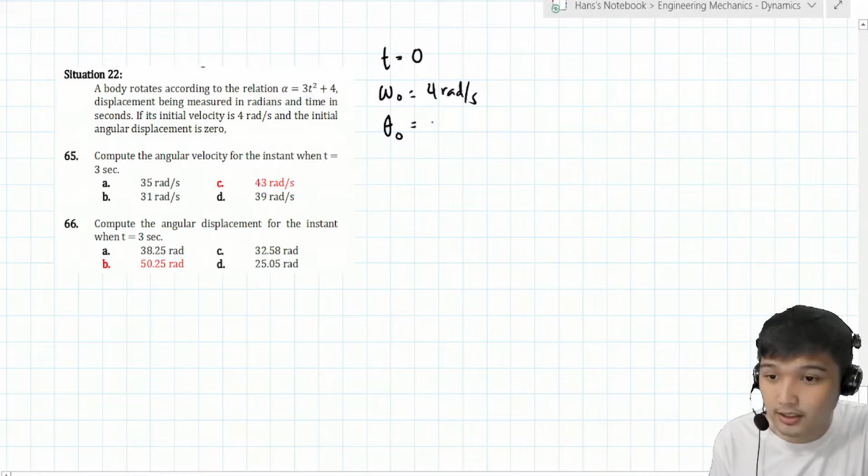Angular displacement - so the relationship between angular acceleration and time t is given as alpha equals 3t squared plus 4. For number 65, we're asked for the angular velocity when t equals 3 seconds.

Now what we can do is recall that alpha is d omega over dt. Let's rewrite the equation: d omega over dt equals 3t squared plus 4, then cross multiply to get dt, and then let's integrate.

So integrating, omega becomes 3t cubed over 3 plus 4t plus c. Let's cancel this, but there's still a constant c, so to eliminate that constant we can use the initial condition.

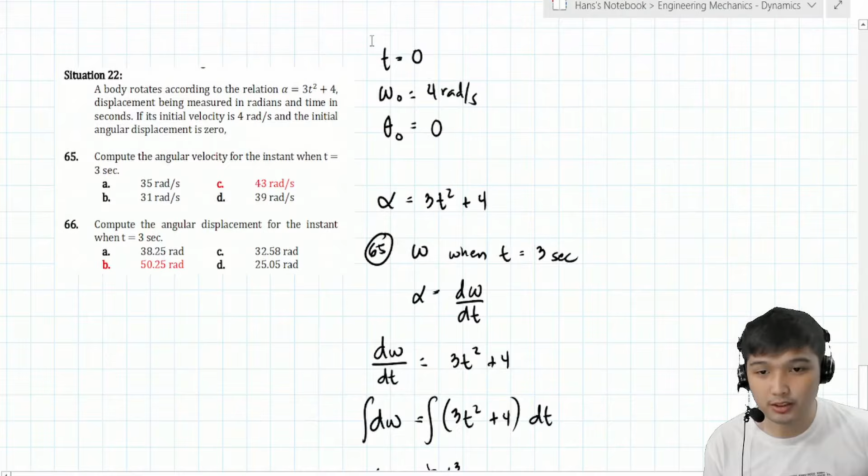At t equals 0, omega equals 4. Rewriting, omega equals t cubed plus 4t plus c. So 4 equals 0 cubed plus 4 times 0 plus c, therefore c equals 4. So the equation relating omega to time t becomes t cubed plus 4t plus 4.

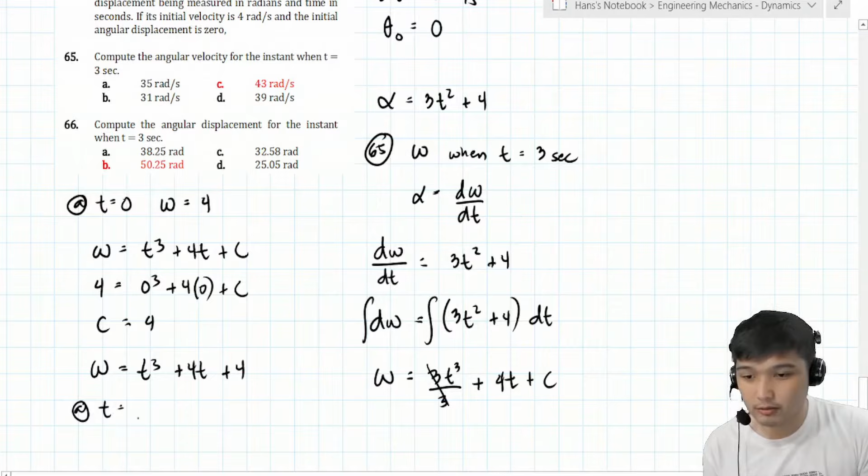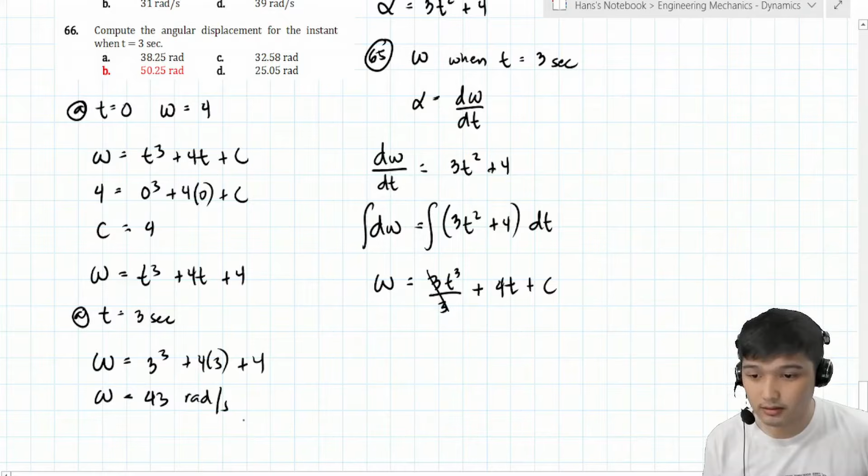Now we can solve for omega at t equals 3 seconds. Rewriting, it becomes 3 cubed plus 4 times 3 plus 4. So how much is the angular velocity after 3 seconds, guys? That is 43 radians per second. Let's check if we're correct - yes, 43. Check.

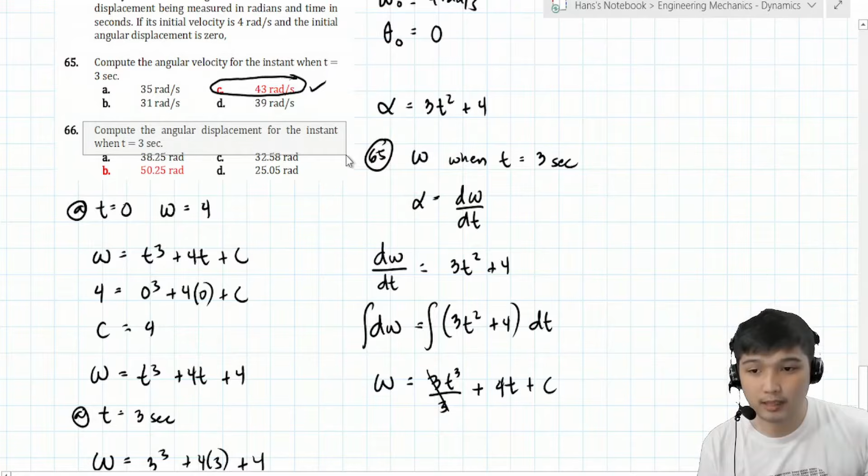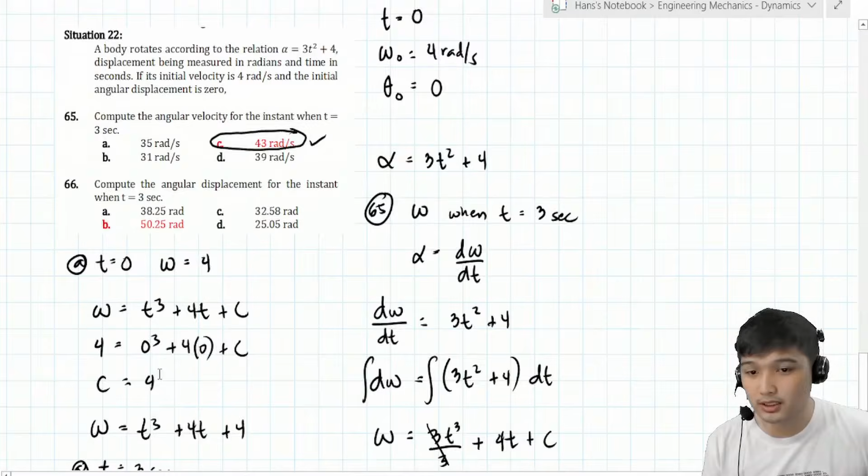Next is to compute the angular displacement when time equals 3 seconds. Let's start from this equation here, let me rewrite it for number 66 down here. We're asked for theta when t equals 3 seconds.

So let's start now with the angular velocity. Recall that angular velocity is d theta over dt. We have to rewrite this as d theta over dt equals t cubed plus 4t plus 4. Cross multiply, so it becomes t cubed plus 4t plus 4 dt.

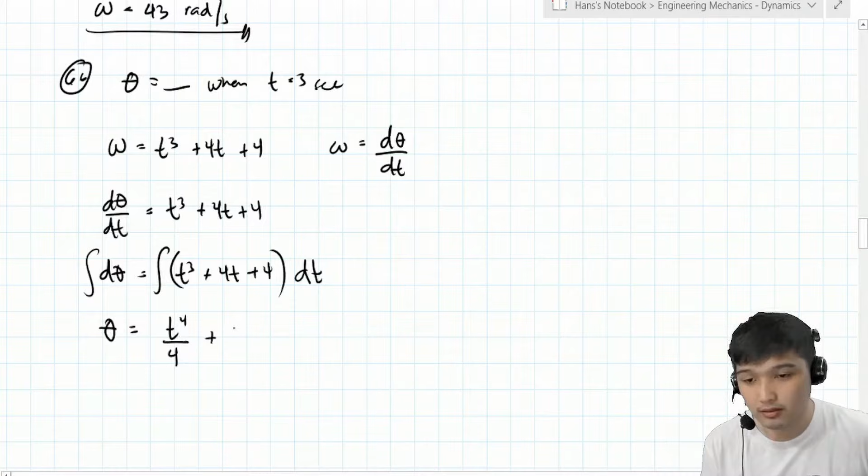So integrate, therefore theta becomes t raised to 4 over 4, plus 4t squared over 2, plus 4t, plus c. Let's simplify this to 2. As you can see, there's still a c, so we have to eliminate that c.

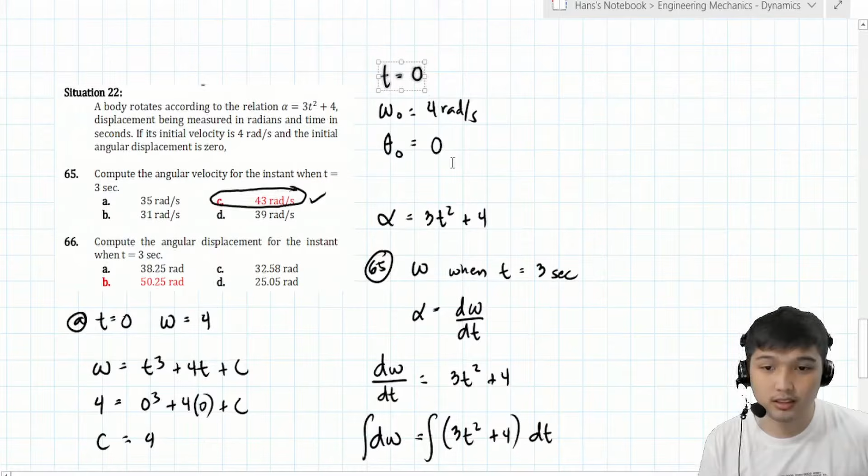Where do we eliminate that, guys? Using again the initial condition that at time equals 0, theta equals 0. Let's put that here: at t equals 0, theta equals 0. So let's use the equation: theta equals t raised to 4 over 4 plus 2t squared plus 4t plus c.

Substituting, 0 equals - as you can see, this all becomes 0 - 0 plus 0 plus 0 plus c. Therefore c now equals 0. So this is now the equation relating the angular displacement and the time t.

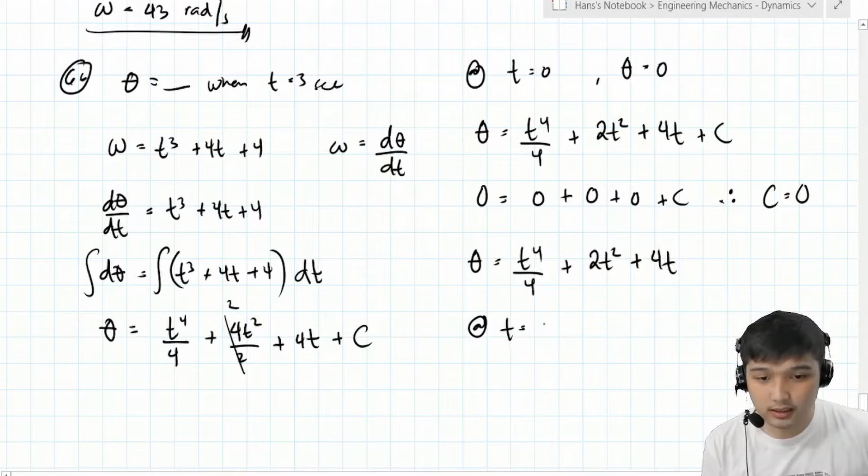So what's being asked: at t equals 3 seconds, substitute, theta now equals 3 raised to 4 over 4 plus 2 times 3 squared, plus 4 times 3. So how much is the angular displacement after 3 seconds?

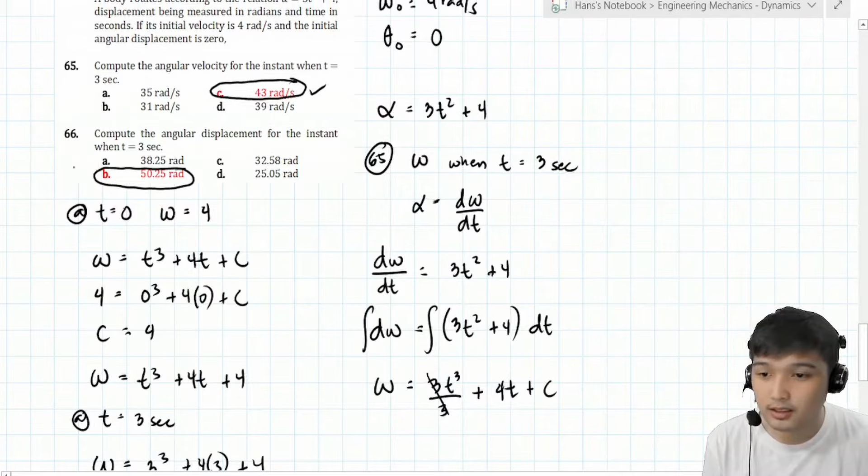The answer is 50.25, and the unit will be in radians. Let's check if you're correct - correct, guys, letter B. Check. So let's move to the next item.

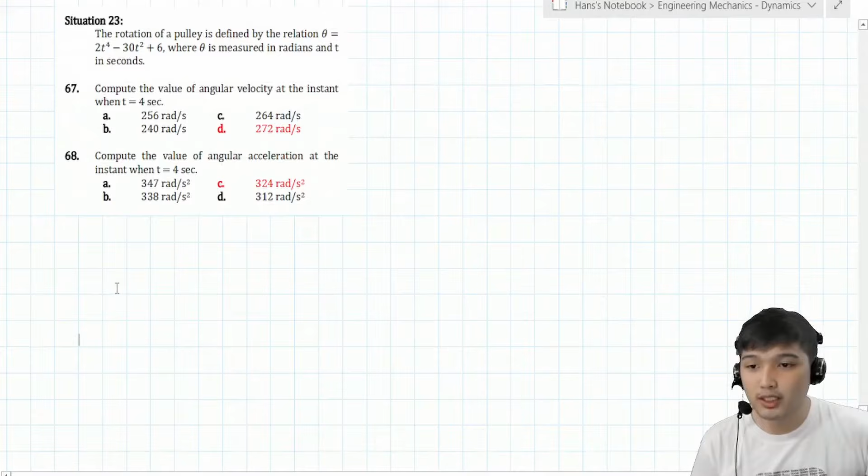So, Situation 23. The rotation of a pulley is defined by the relation theta equals 2t raised to 4 minus 30t squared plus 6, where theta is measured in radians and t is in seconds. Compute the value of the angular velocity when t is equal to 4, and compute the value of the angular acceleration at the instant when t is equal to 4 seconds.

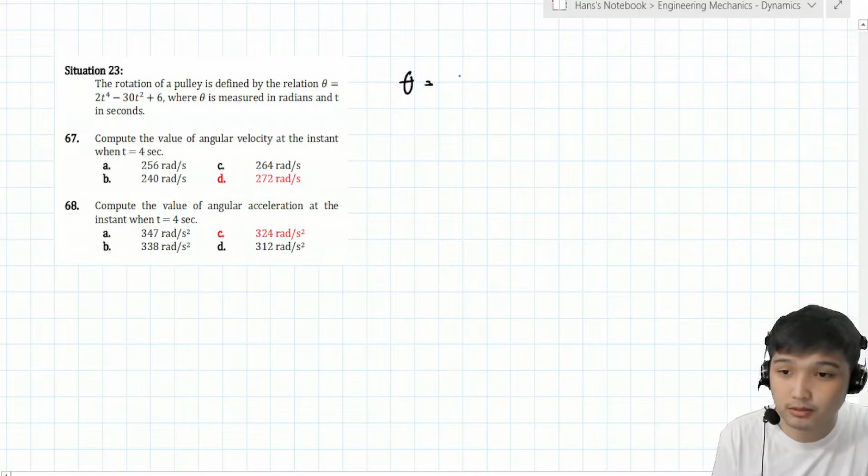So here it's reversed, starting from the relationship of angular displacement to time t. Let's write that: theta is equal to 2t raised to 4 minus 30t squared plus 6.

Taking its first derivative, d theta over dt, we get omega, which is 8t cubed minus 60t. Then taking the second derivative with respect to time t, dt squared.

That becomes the angular acceleration, which is 24t squared minus 60.

So for number 67, what's being asked is at t equal to 4 seconds, the value of omega. Using the equation for omega in terms of time t, that is 8t cubed minus 60t, substitute 4 for t.

So what comes out as the angular velocity at that time? That is simply 272 radians per second. So that is letter D.

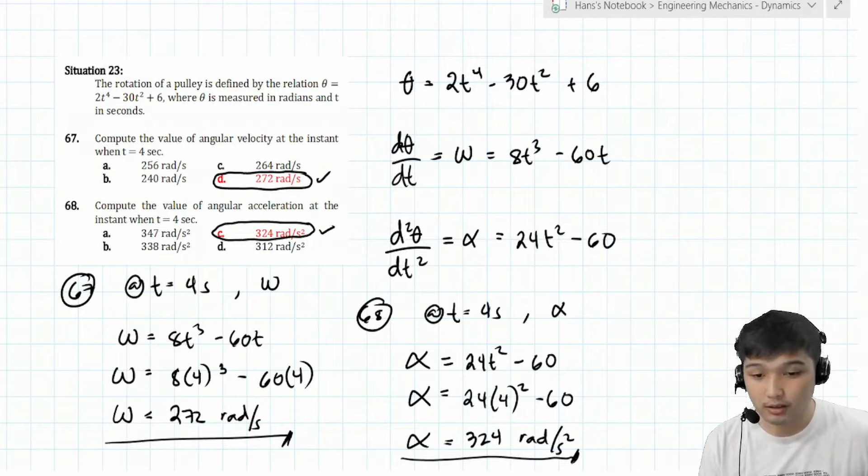Situation 24. The angular acceleration of a pulley which will rotate from rest is increased uniformly from 0 to 12 radians per second squared for 4 seconds, and then uniformly decreased to 4 radians per second squared during the next 3 seconds. The questions: determine the angular velocity at the end of 4 seconds, determine the angular displacement at the end of 4 seconds, and determine the angular displacement at the end of 7 seconds.

As you can see class, there's no given equation relating displacement to time, nor velocity to time, nor acceleration to time. No equation was provided, but what we have is the story of how the acceleration changed. So I think the main focus of the problem is about angular acceleration.

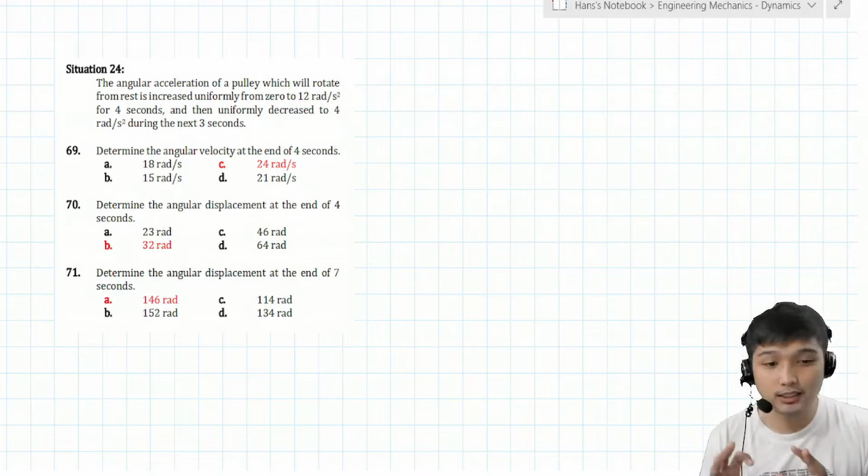This falls under what we call the motion curve. Instead of providing the relationship of our parameters with respect to time t as an equation, it's shown that we can give the relationship using a diagram, and it starts with acceleration. So we can actually graph the acceleration-time diagram, but in this case, it's called the angular acceleration-time diagram. If you recall the motion curve, this is very doable, guys.

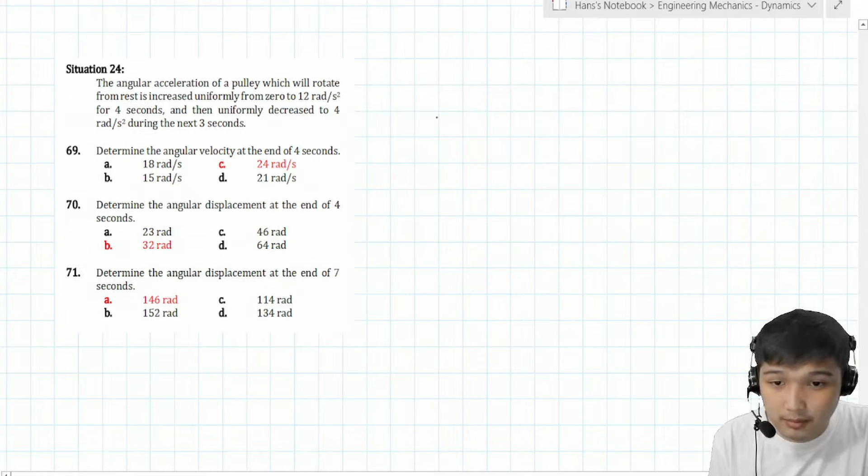Let's interpret and draw the diagram first. Let's say, for example, here. The condition we have is after 4 seconds, so let's say this is 4, this is 0, and after the next 3 seconds, that is 7. Let's label this t, and this is the angular acceleration. Let's call this the angular acceleration-time diagram.

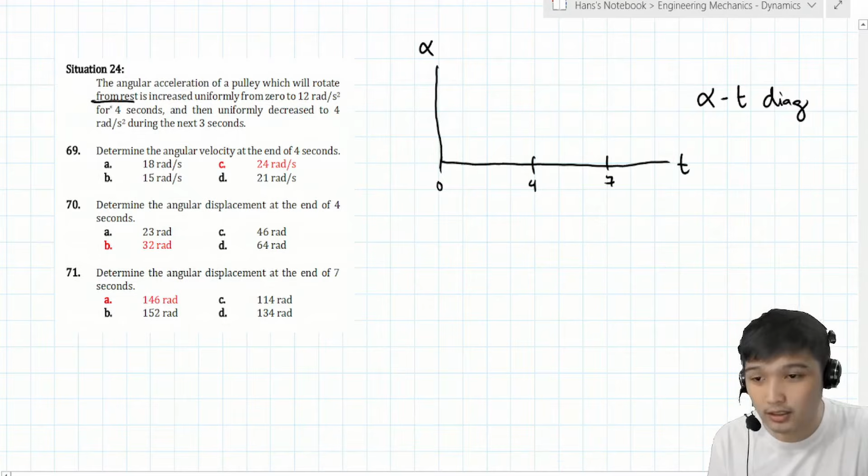So what was said? The angular acceleration of the pulley which will rotate from rest — take note the initial angular velocity is 0. It increased uniformly from 0 to 12 for 4 seconds, meaning at the starting point it's 0, and at 4 seconds it became 12. So for example, this is it.

And it says increased uniformly, meaning this is connected by a line. Let's fix this up, guys.

And then, after the next 3 seconds, the angular acceleration is uniformly decreased to 4 radians per second squared during the next 3 seconds. Meaning at the 7th second, the angular acceleration becomes 4 radians per second squared. So for example, this is it, 4. If we project it here, that's 4.

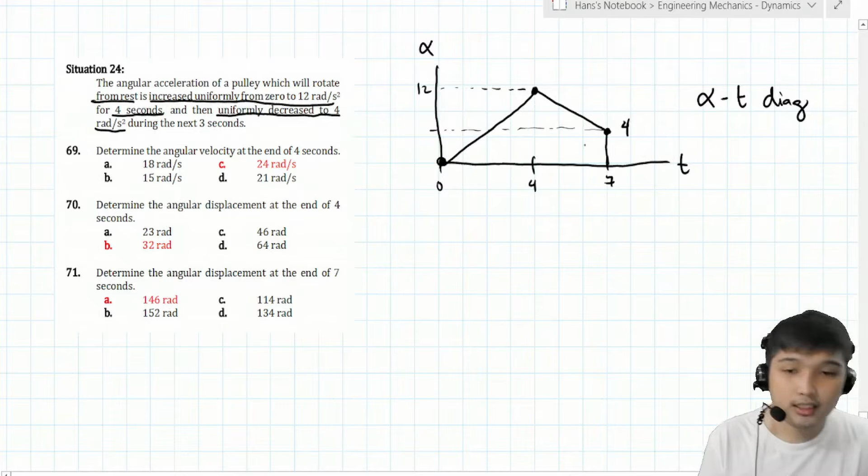And it says uniformly decreased, meaning connected by a line again. So this is the resulting angular acceleration-time diagram. Using that, we can now solve for what's being asked — the velocity and displacement — by further drawing the succeeding diagrams.

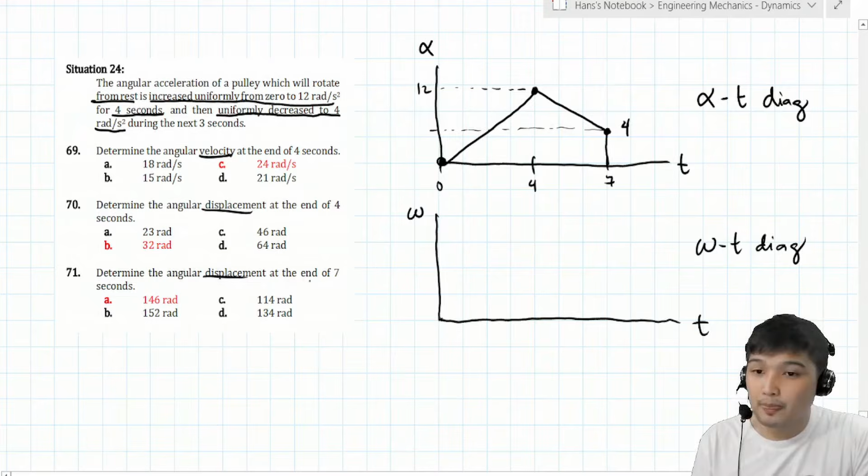So this is the angular velocity time diagram. The initial condition: at time equal to 0, the pulley is at rest, so we're sure we're at 0. Now how do we get to the succeeding points?

Recall the motion curve - that refers to the area of the diagram above. So from 0, we add the area above to get to 4. What is the area of this one? Triangle, 1/2 base is 4, height is 12, so that is 24. So 0 plus 24, we're now at 4 seconds.

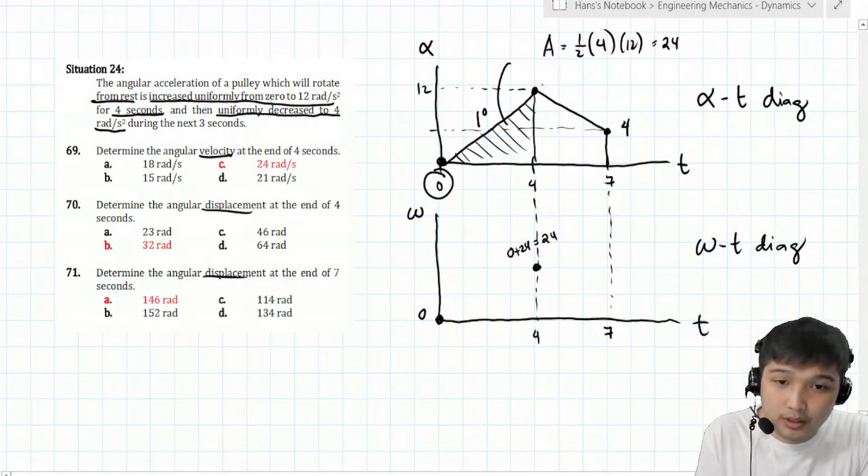For example, this: 0 plus 24, so that's 24. How do we connect that? The diagram above is first degree, so this one is second degree. What type of second degree - increasing or decreasing slope? Check the diagram above: it starts at 0, goes to 12, so that's increasing. So we use the increasing curve, from negative slope going to positive slope, so concave upward.

So I think we've answered the first question: determine the angular velocity at the end of 4 seconds. The answer is 24 rad per second. Now let's continue drawing the diagram.

To get to 7 seconds, what do we do? We add this area, which is a trapezoid. For the area: 1/2, base 1 is 12, the other is 4, and the length is 3. How much is that? That is 24. Positive area, meaning from 24 we go up another 24, so 24 plus 24 equals 48. So after 7 seconds, we're at 48 rad per second.

How do we connect that? This is still first degree, so this one is second degree. We need to connect the 2 points using a second degree curve. What type? From 12, what's the height now - 4. So from 12 it becomes 4, that is decreasing. So we use the decreasing slope, from positive going to negative, so that is concave downward.

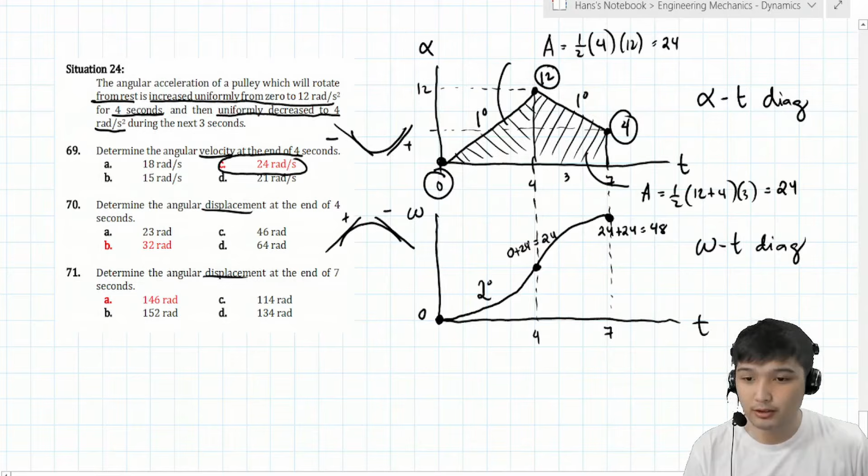So that's now the curve representing the angular velocity time diagram. Finally we can now solve the last 2 items being asked, which is angular displacement.

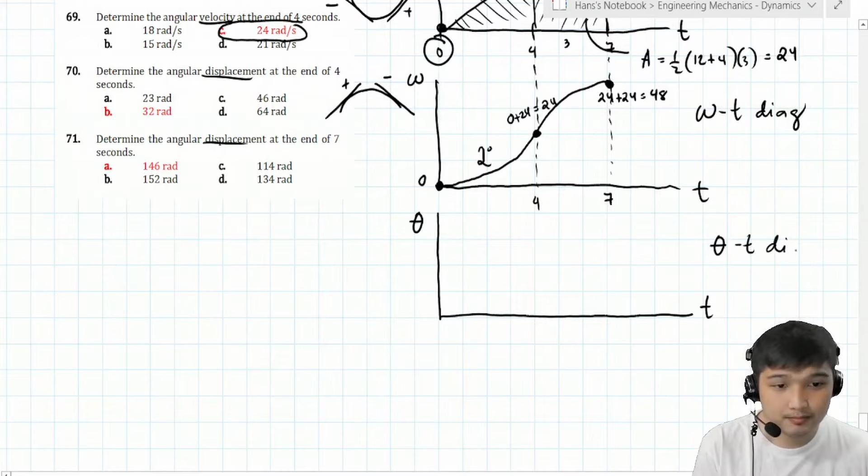We just have to draw the third diagram. Let's call this the theta or angular displacement time diagram. Let's start drawing - mark the important points, 4 and 7.

It was said initially, where is it? Nothing was stated, so let's assume it starts at 0. If it's at 0, how do we get to 4 seconds? We just add the area above. This one is second degree, so can we use the area of the spandrel, which is 1/3 base times the height, for second degree?

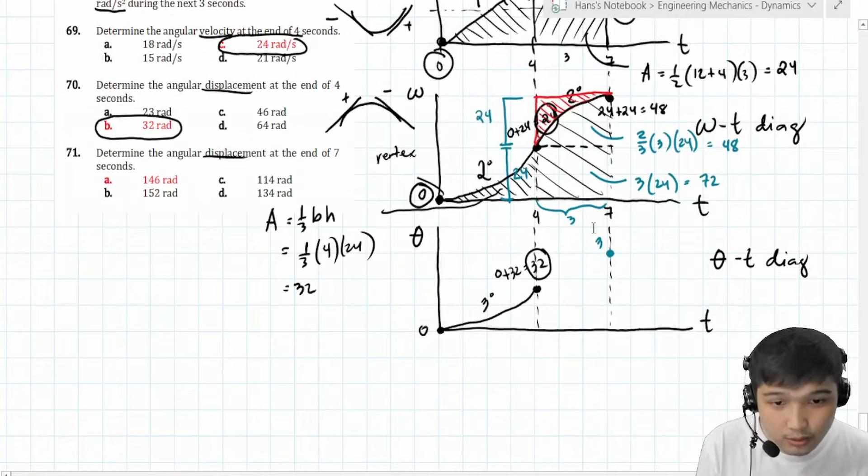So if you forced that, guys, what would happen is the point here after 7 seconds would be from 32, which is this, plus the area. Plus 48 plus 72. So how much is that, guys? So the answer there is 152.

Okay, let's continue. So, right, this point, 24. Then this, 48. So, meaning to say, increasing. So the curve we'll use is concave upward. So like this.

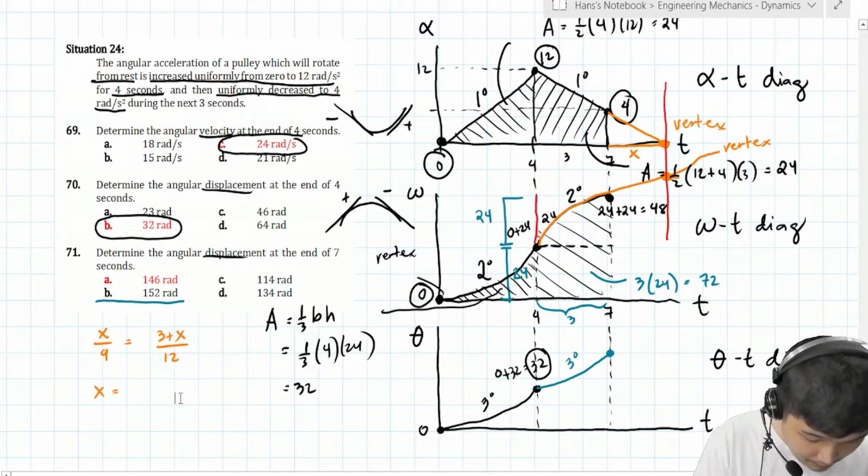Ay, hindi to 3 plus 4, no? Ano to? 3 plus x. Ulitin ko, for x, the height is 4. So for the length of 3 plus x, the height is 12. Ilan yung x, guys? Okay, so that is 1.5.

So may additional length na 1.5. Kung bibigyan kong kulay ito, guys, take note, ito lang yung gusto natin. I-highlight ko ng dilaw. Ito lang yung gusto natin. Sabi nga natin, hindi applicable yung 2/3 base times the height kung hindi vertex yung dulo.

So what we can do is maybe we can solve muna ito. Kapag kinuha ko to, itong sinishade kong kulay red, nakita nyo ba yan? Yung buong part neto ng parabola, for that scenario, applicable ba yung 2/3 base times the height? Para sa area na to, sa shaded region, pwede yun, guys, kasi yung endpoint natin is a vertex. So for the shaded region, tama yan, yan ay 2/3 base times the height.

So ang problema, ano yung base niya? Siyempre, itong length na to. Ilan ba yung length na yan? Di ba 3 plus x yan? So that is 3 plus 1.5. This one is 4.5. So 2/3 base.

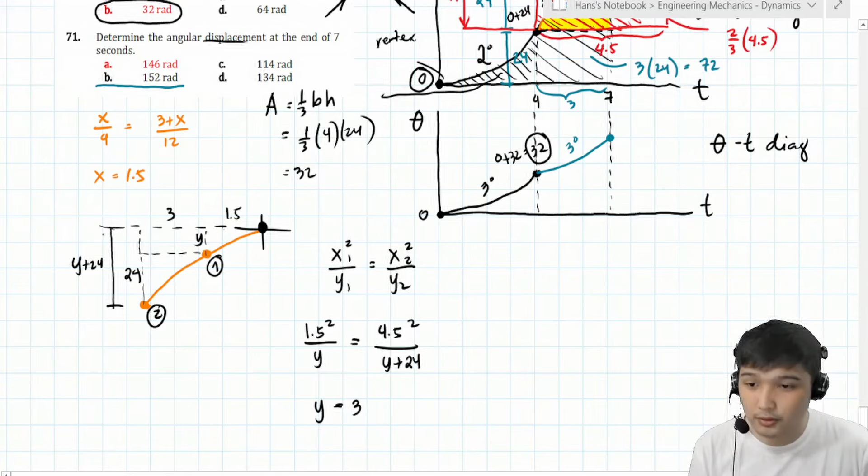Okay, so y is 3. So therefore, yung total height pala nito is 27. Na yun yung kailangan natin dito na h. Okay lang? So lagay natin, ito ay 27.

So therefore, balik tayo dun sa shaded ng red, ito. So that is 2/3 base is 4.5, height is 27. So ilan yan? 81. But take note, ang kailangan lang natin is itong shaded ng kulay dilaw.

So pwede siguro akong pumunta dito, no? Dito ko na i-continue yung solution ko. So ito kasi yung kulay red, no? Yung total na to. Pero ang kailangan nga lang natin is ito, yung kinulayan ko ng dilaw.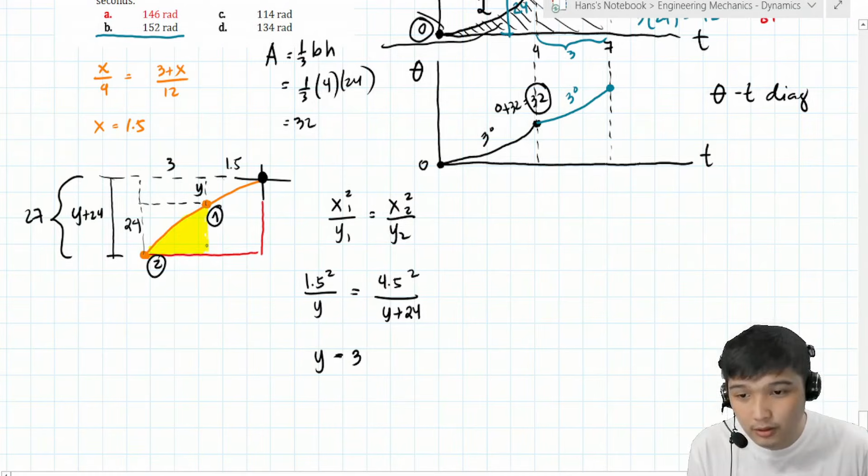So anong gagawin natin sa 81? E di from the 81, tatanggalin naman natin itong kukulayan ko ng kulay blue. Ayan. So sa kinulayan kong kulay blue, meron dalawang segment: isang rectangle at isang parabola.

For this parabola, applicable na yung 2/3 base times the height since yung endpoint nga na to is vertex. So applicable sa kanya yung 2/3 base times the height. Okay? So recall, ano yung height niya guys nung parabola na yan?

Di ba 3 lang? Ito sa baba, ilan to? 24 to, di ba? So gawin natin, 2/3 base is 1.5 and then yung height niya is 3. So ilan yan guys? I think 4.5 for the parabola dito.

And then for the blue region na rectangle, area is, base is 1.5, height is 24. That is 36. So meaning to say, yung area ng dilaw, ito na lang. So meaning to say, yung area niyan, yung tinuturo ko, is equal to the total area nung malaking parabola na yan, which is nakuha na natin kanina as 81, minus itong maliit na parabola, which is 4.5, minus itong area na to ng rectangle, 36.

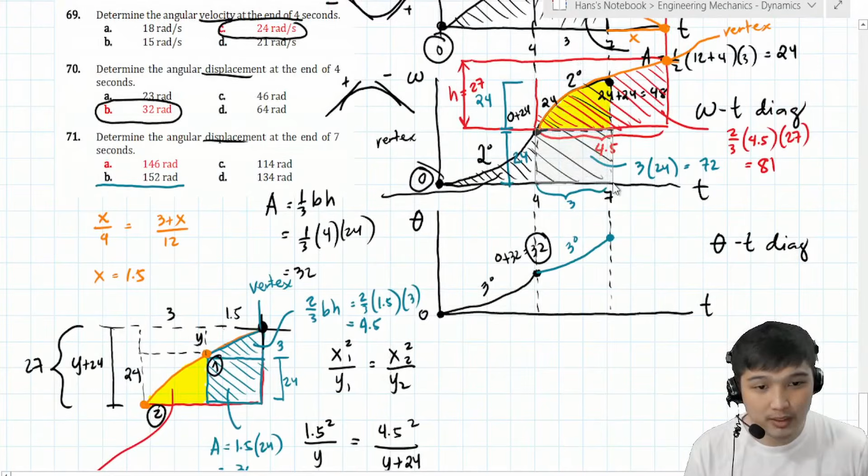Ito sure naman na to na 72. So, kung babalikan natin yung procedure from 32, ang gagawin natin, lagay natin dito, 32. Ipa-plus natin tong shaded as 40.5. Plus, itong rectangle sa baba as 72. I-check na natin guys, tama ba?

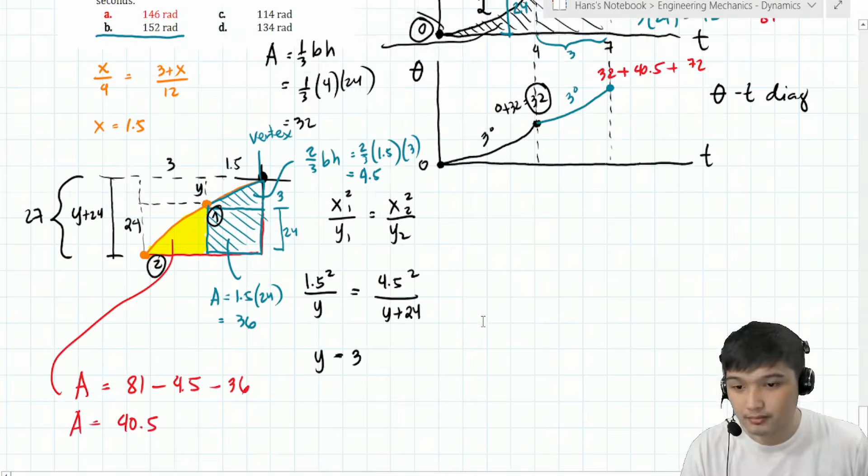Ayan, no? So, nagtaka ako bakit may 0.5. Ito pala ay ano lang. Ito ay 3 lang guys. So, ayusin natin. Ito ay 3 lang. So, therefore, ito ay minus 3. At ilan ito guys? So, sorry guys.

Ayan, ito pala ay 42. Ayan. So, balik tayo. So, ito pala ay plus 42. Okay lang? Ayan na, 2/3 of 1.5 times 3. Ano lang pala yun? 3 lang pala. So, namali pa ako ng mental, no? But anyways, ayan na siya.

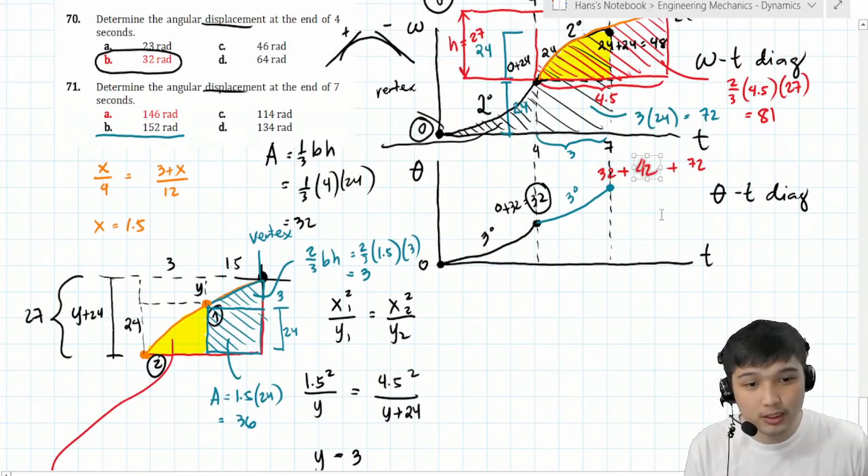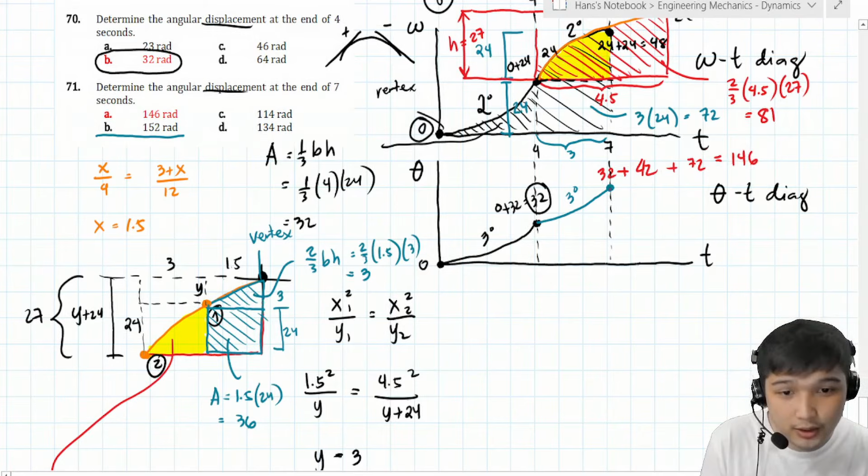32 plus 42 plus 72. So, ilan yan, guys? Okay, so that is a total of 146. So, yun na ngayon yung height at this point, which is, yun na hinahanap natin, angular displacement at the end of 7 seconds. So, the correct answer is letter A.

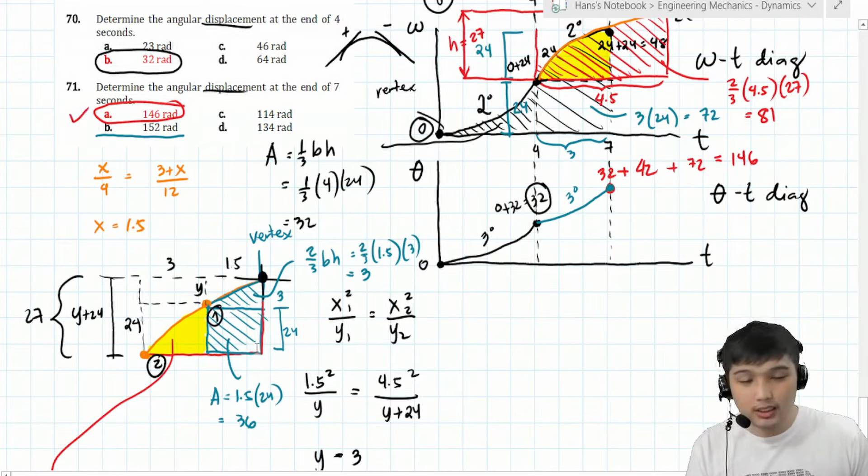Okay, so check. So, as you can see, sobrang prone sa error ng solution na to. At the same time, kailangan mo yung ganitong analysis. Hanapin mo yung vertex. Marunong kang gumamit ng square property of parabola. Tapos marunong kang kumuha ng mga segmental areas. No? Alam mo yung mga geometry. So, hindi ka rin magkakamali katulad ko na pipindot na lang ng calculator, minental pa. So, nagkamali. No? So, ganun siya ka-prone sa error kung yan nga yung ipo-pursue mong solusyon.

So, that's why, balikan natin yung tinatawag natin as moment area method. So, recall, sinasabi ng moment area method that yung position niya at point 2 ay equal sa position niya at point 1 plus yung initial velocity niya times yung time interval between point 1 saka point 2 and then plus the area, okay, area moment of the acceleration time diagram between that time interval.

So that is the same, no, for the rotation or angular measurement. So magiging ano lang to, theta 2 is equal to theta 1 plus ito magiging omega 1 lang time interval t. Ganun pa rin to. Area moment of the angular acceleration time diagram. Okay, mapapalitan lang yung mga symbol. So, tingin na lang tayo dito, guys. 'Di ba ito yung angular acceleration time diagram?

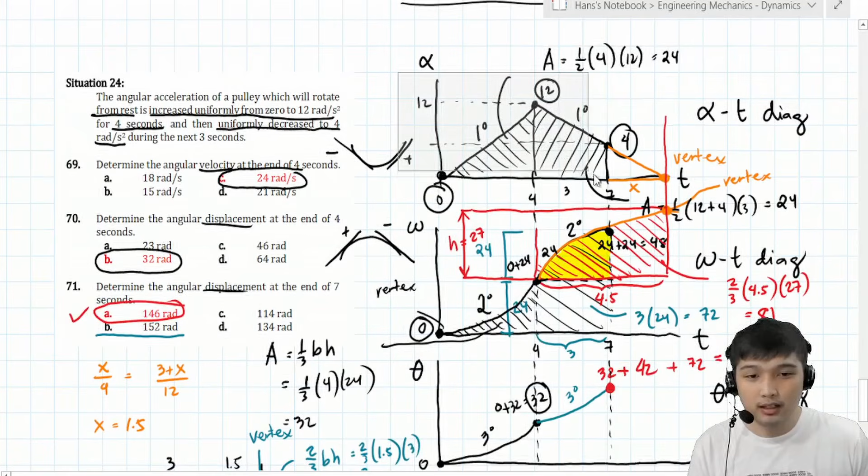So, let us use this, highlight it in green. Let's find point 1 and point 2. For example, let's apply it here at 71, then you apply it here at 70. You can also answer this using the moment area method.

But let's just do the last problem since this one is difficult. So we are referring our point 2 as the 7th second. Let's put it here, this is point 2. Then let's assume point 1 is the starting point. As previously discussed, you can use any other point as your point 1.

So long as you know the velocity there, and you know the position at that point. So let's assume, let's use the first one here. This is our point 1, the initial. So let's define T1 is 0.

What is the velocity, the angular velocity at point 1? So it's also 0, right? What is the position, or the angular position, at point 1? Let's call it theta 1. So it's also at 0.

So at point 2, time 2 is after 7 seconds. So we are looking for, instead of S, theta 2. Let's use the formula.

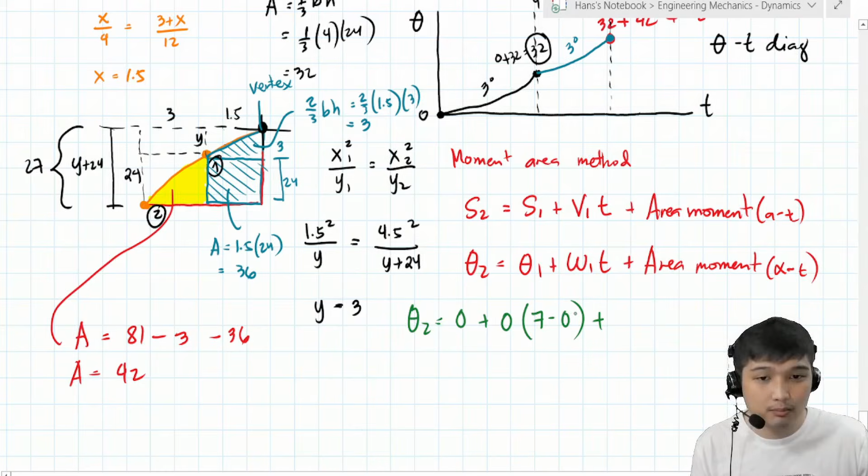So let's highlight it in green as well. So theta 2 now is equal to, this is 0, this becomes 0. And then what is the time interval? T2 minus T1, so 7 minus 0. And then plus the area moment of the acceleration-time diagram between the time interval. So we are referring to this area. Let me highlight it in blue.

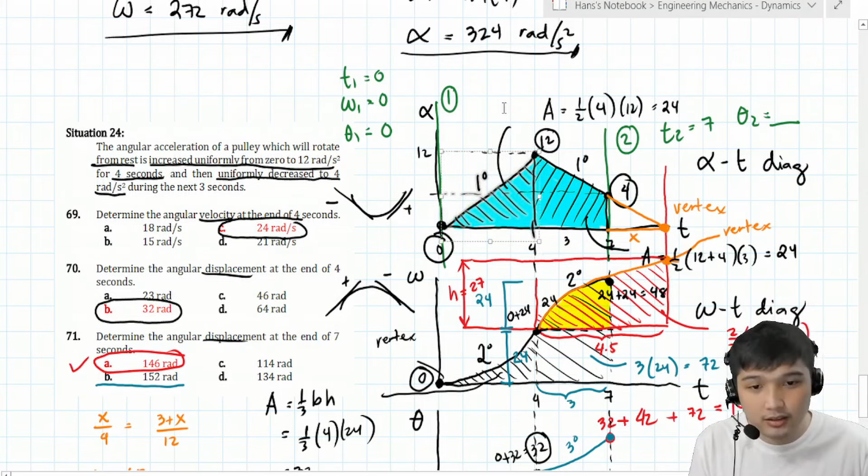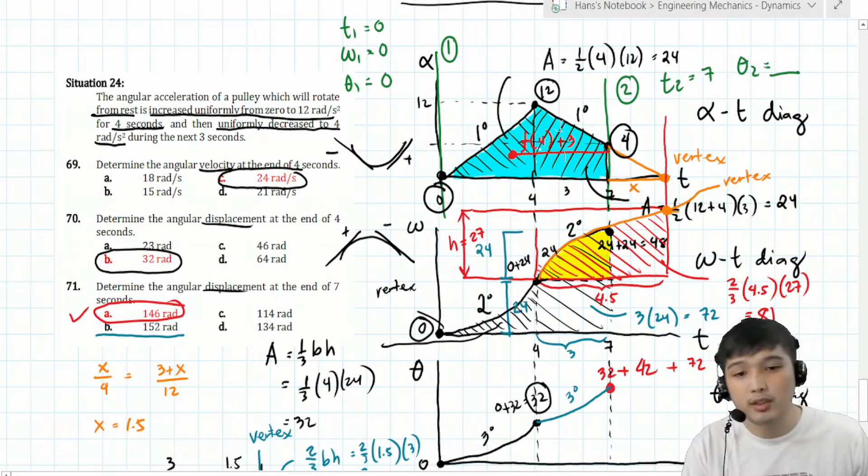So what is its moment arm, guys? If this is 3, therefore this is 1/3 of 4. So let's put 1/3 of 4 plus 3. Can you see what I wrote? Let's zoom in. There, okay?

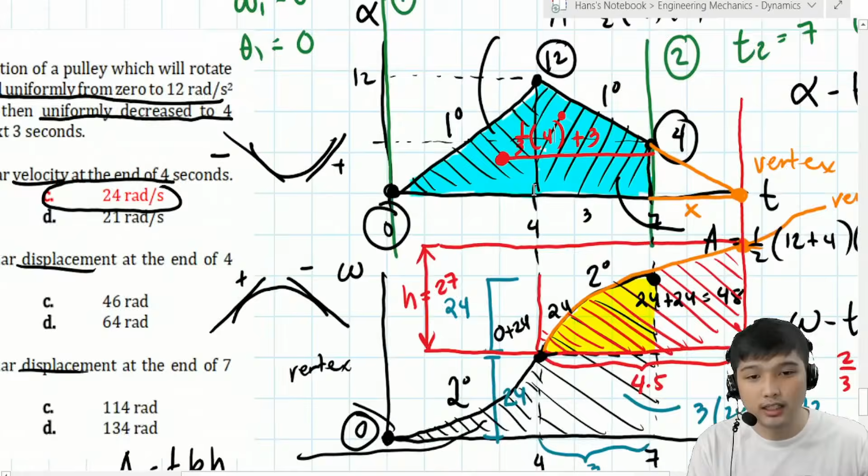So for the smaller triangle, this is its centroid. Do we have an area for that yet? No, right? We solved it earlier as a whole trapezoid. So we'll get it by segment. Let's get its area, and then this is its distance, the distance from the centroid to point 2. So this one is 2/3 of its base.

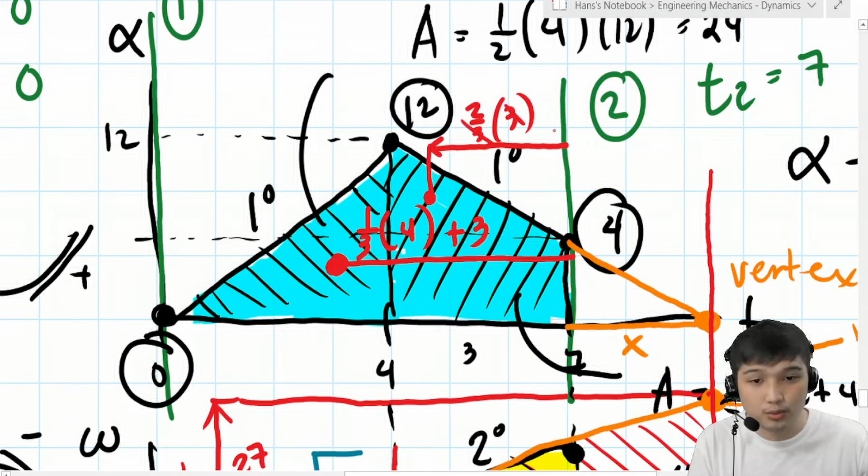Its base is 3, so cancel, becomes 2. For the rectangle, this one is half of 3, so 1.5. Okay lang? I went faster since we already did this before.

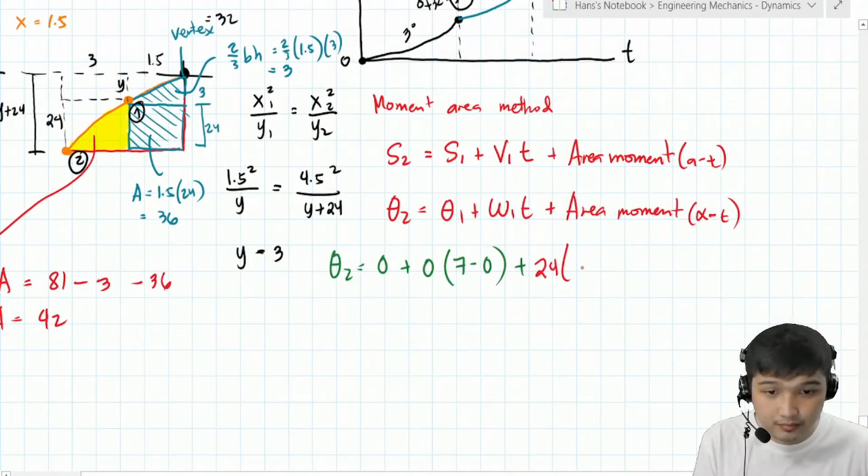Okay, and then plus. All of them are positive areas, so plus all of them. So now this is the small triangle. Let's get its area first. What is the area of the small triangle? That is 1/2, base is 3.

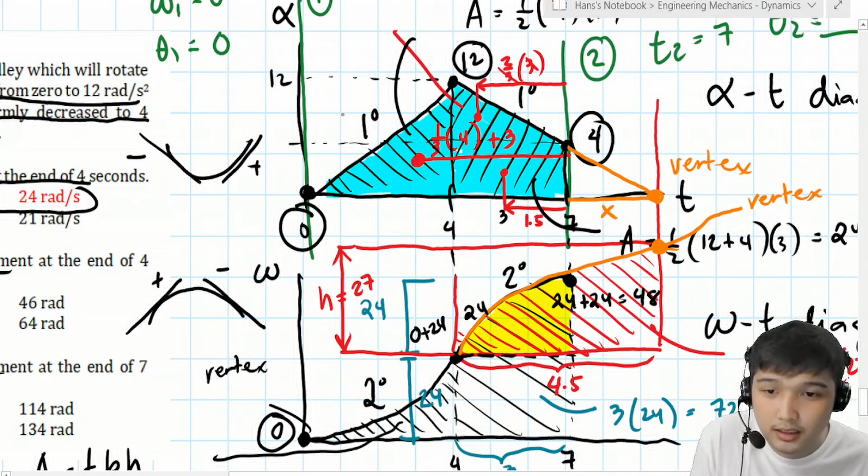What is the height, guys? Let's check it. If this is 4, right, its height is 4, and the total height is 12. Therefore, its height is 8. So 1/2, base is 3, height is 8.

So I think this one is 12. So let's put area, then moment arm, the 2/3 of 3. Right? This one. It's already at 2 there, right? But I already put it, that's fine.

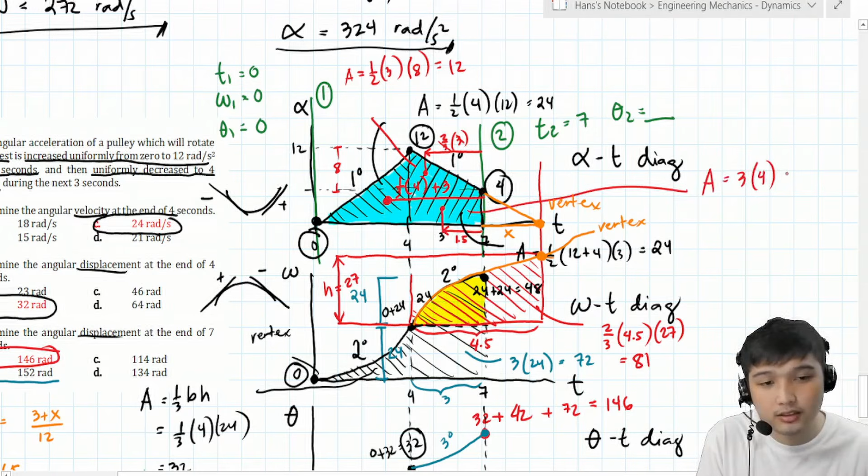So lastly, for the rectangle, this one at the bottom, let me put it here. Area is base times height. Base is 3, height is 4, so this is 12. Let's put plus 12. So the moment arm is 1.5.

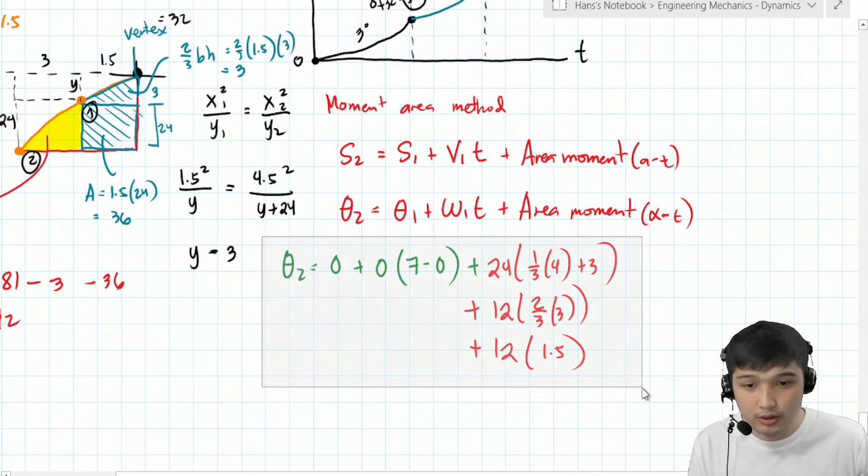As you can see, the solution is very short, and direct to the point. So let's check if we get the same position at point 2, after 7 seconds. Please press it, guys. Okay, so the answer is the same as

146. So the angular displacement we discussed, this is in radians. So it's the same. Is that the same as before? This one, right? So it's just the same, guys.

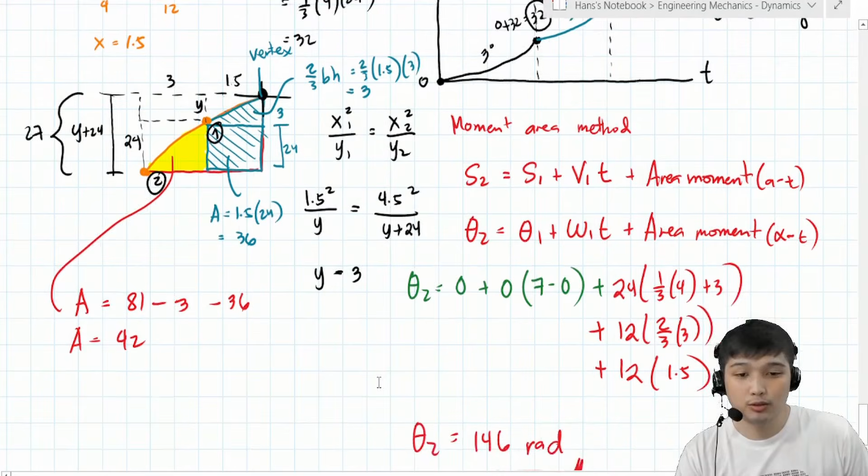But the solution is shorter, so it's up to you. I showed this because last time I said it's possible but I didn't show it, I didn't elaborate. But this time, I showed it. At least you have 2 choices on how you will solve the angular displacement.